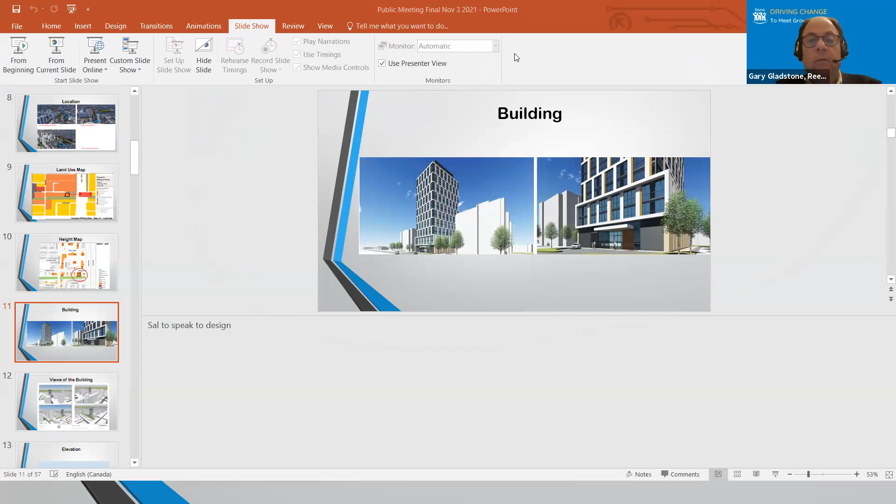We support people with all faiths, cultures, and backgrounds. Reena has been active in developing solutions, not only for ourselves but for the sector. Housing is one of those areas where we've taken a lead role provincially and nationally to address a major concern. We looked at it from the perspective of what are the challenges, what are people experiencing, and how do we solve it.

The number one thing is affordability. When we talk about affordability, I call these the three abilities. We're talking about deeply affordable housing for people who live on $1,200 a month, and how do we give them a place in our community. So we design and plan so that people can afford under $500 a month rent. That is a portion of the community, and a large portion of the community we want to make sure can have access to proper housing.

The second challenge is supportability, probably the biggest challenge for people who have support needs. How do they get just the right supports when they need it and as they need it? That often needs coordinating staffing structures, having access 24/7 without having someone 24/7 in your space. We've been able to develop and model support plans that reduce costs for everyone—the individual, the province—and increase people's sense of safety and security.

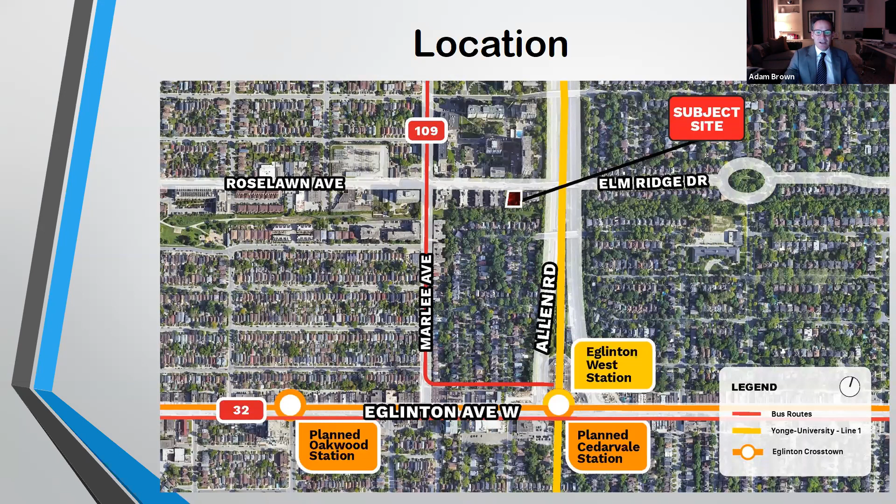I think most of you who live in the area know, and again, Michael Colle, the councillor, has already very clearly described the location. This is just a map that shows you truly how accessible it is to transit, to the subway, to the new Eglinton Crosstown, and to all the facilities in the area, which everyone knows about. So we can go to the next slide.

What we've done here, again, which most of you will know, is given you an overview looking southeast, looking east, looking northeast of the apartment neighborhood and the makeup of that neighborhood in terms of the higher buildings that are included in the immediate neighborhood of this site.

We're also well aware that to the back of the site is a single family neighborhood, which is designated in that way in the official plan. So we've looked at that, considered that in terms of the design that Sal, who's our architect, will discuss in a minute. So if we can go to the next slide.

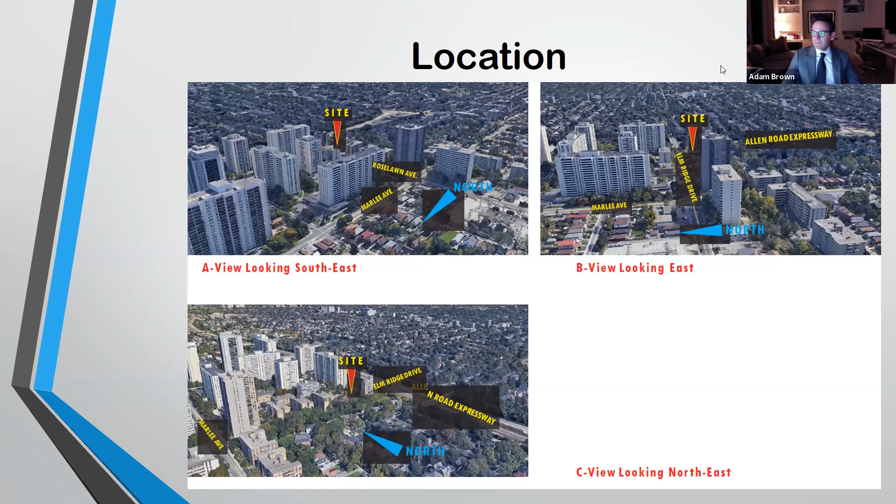This is a slide that shows you the apartment neighborhoods that we showed you with the aerial photos, with the varying heights of the buildings, 7, 9, we're proposed at 19 stories, and all those other buildings, 17, 24, 18. And it gave us some measure of comparison in terms of what we were proposing.

It's critical that we bring forward a design that meets the official plan policies, meets many of the very stringent and important guidelines that the city brings to bear when looking at these applications.

We know this is the beginning of a process which we hope to be expedited, and there's going to be tweaks and input from the city and various staff members. But we think we've brought in an application that's reasonable, not on the highest end of the heights, but still can help us achieve what we need, which is to bring as many units as possible for people like the one who wrote in about their brother needing to get into this building. It's critical that we have a critical mass that makes it function and work for the end users of the building.

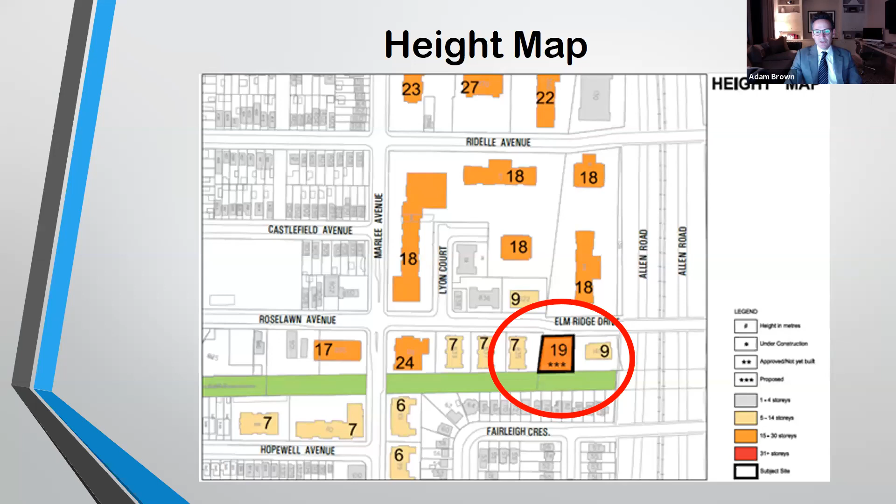Next slide. I'm going to turn it over to Sal. Again, I'll remind everyone that at the very end we'll be here to answer questions. What's important is that we hear from those in the community who live there, who have concerns and comments, and can support us in the process. We want to move forward as quickly and expeditiously as possible, but with a significant focus on cooperation and having the community work with us, because at the end of the day this facility needs the community and the community's support. So Sal, I'll turn it over to you.

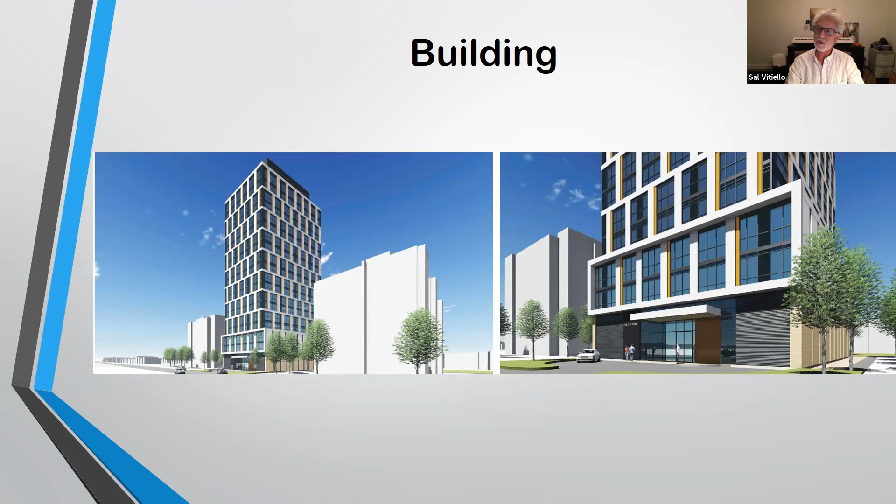We've done quite a few, including the one Brian has in the background picture that's just been occupied recently. Beautiful building. The quality of the materials, both outside and inside, are actually higher than most developers put in, because Reena wants that building to last a long, long time. They don't need the maintenance issues that some leave over to residents who become owners of condo units, let's say. So the quality of the building and what they put into it is quite remarkable, and we're really proud to work with them.

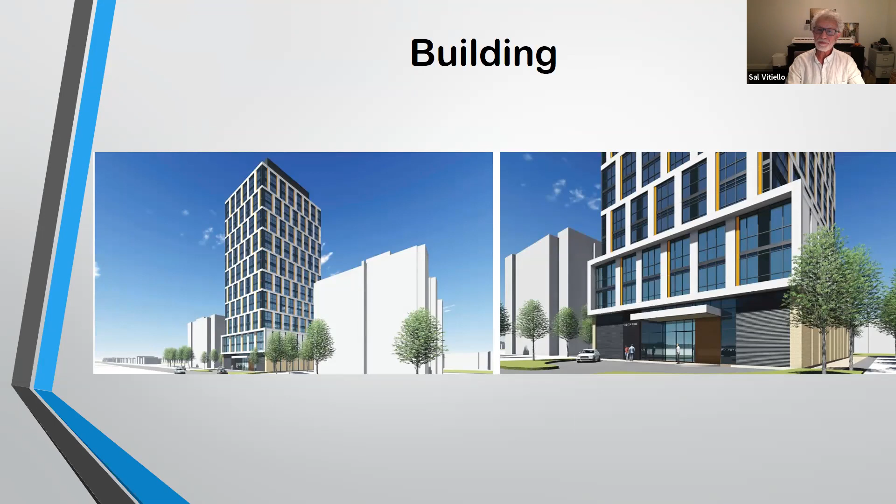Perhaps we can go to the next slide. The building is in a neighborhood, as Adam was mentioning, with 24-story, 18-story buildings, and some smaller buildings. To our east is a 9-story building. To our west is a 7-story building.

In the city of Toronto, we've been working with them to try to make sure we meet as many of the tall building guidelines the city has set out over the past few years. We think we've accommodated most of them. There are some we'll continue discussing with the city, but we believe we have enough setbacks and yard access to the park at the rear for amenity space, that this is a suitable building for the site.

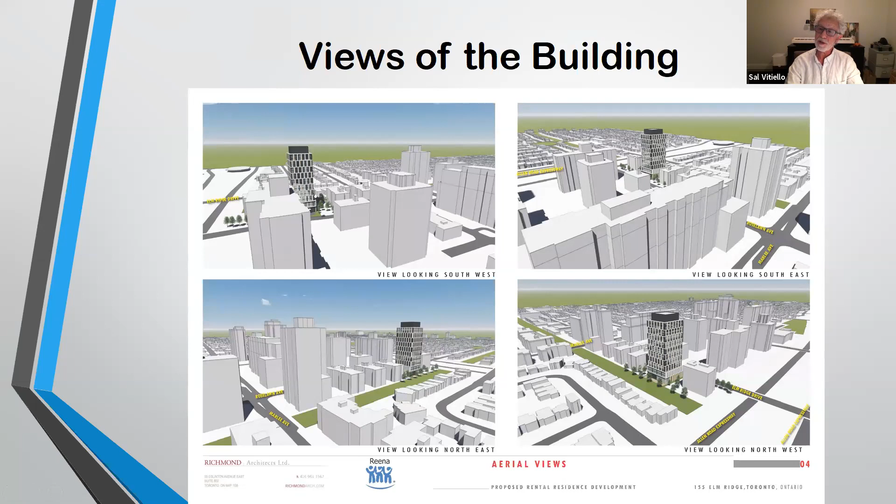And it is going through a review process, which eventually will happen, and it's just started. We've only submitted. The city will send this out to some 20-odd agencies, from school boards to sewers to traffic at the city, to get comments on the building. They eventually bring those back to us after the public meeting with concerns from the public and their own departments, and we work with the city to resolve those. I think we've done a lot of that at the front end, but there'll be more to come, and I'm sure the public will have questions the city will be looking at. So next slide, please.

This gives you an idea of the background, because as much as we have shorter buildings beside us, there's also this background drop that you have, and you can see the heights in the neighborhood. An awful lot of the city now is getting developed where it's checkerboard, where it's high, low. Marine Parade, that whole development done at the water, is in fact built on exactly that principle. So having low, high buildings doesn't bother us. It's really the amount of sky you get to see in the background and the gaps between buildings.

The slab buildings that were done in the old days in this neighborhood are very large floor plates. They sometimes have 12, 14, 16 units on a floor. This building is very small. It's within the floor plate, smaller than the floor plate defined by the city for a tall building—it's in the 600-square-meter floor plate range, as opposed to 750 in the tall building guidelines. So it's a very skinny building with very small shadows. They travel very quickly over any residential properties around, basically sitting on a property for no more than about an hour and a half before they move along.

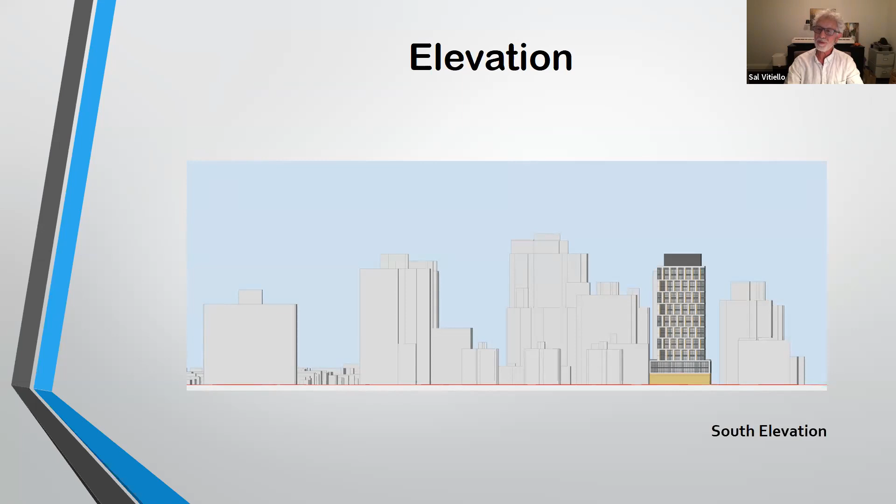Those documents have all been submitted to the city, and I'm sure that after we turn it over there will be an awful lot of questions. So I don't want to talk too much more about the building. I'm happy to answer questions, so I'll turn it back to Brian or Gary, whichever one wants to take it over and take it from there.

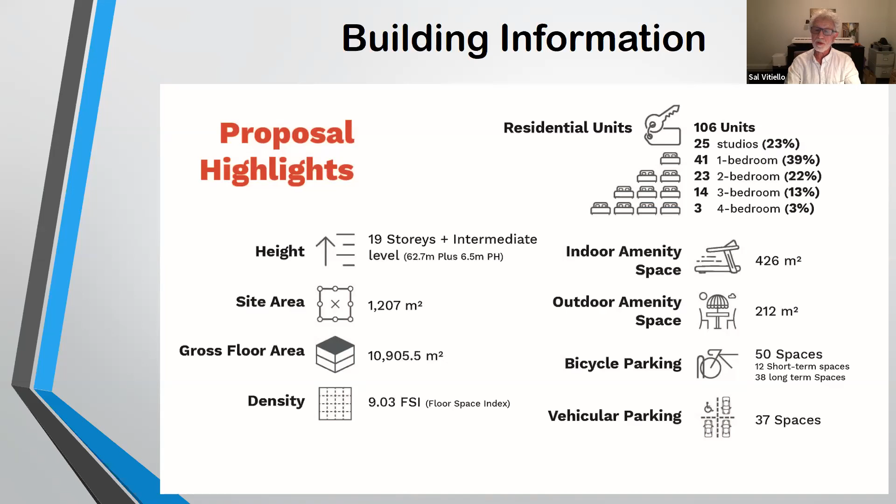Oh yes, I can go through this. Some of this I've already touched on. Height of the building is 19 stories, and the gross floor area is 10,000 meters, which is about 9 times coverage—coverage is really just a formula derived from those two first numbers. There are 106 units; you can see the types, studio units at 23%, and 3 and 4 bedroom units as well. We are providing indoor amenity space, outdoor amenity space, bicycle storage, and the 37 parking spaces I mentioned earlier.

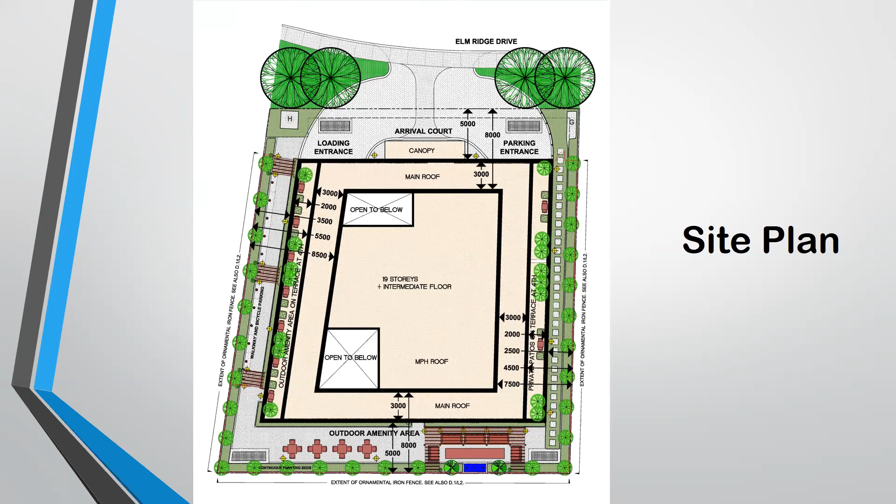Maybe just, sorry, I forgot about these other plans. This is a site plan showing the entrance at the top, on Elm Ridge, coming in off of Elm Ridge. There's a parking entrance to the underground parking on the east side of the building. On the west side is the loading area internal to the building, so the bins will be kept inside and any noise will be kept inside the building. There's a walkway and landscaping of about 5 meters, with dimensions shown on the left and right side as a landscape strip on either side of the tower. The podium is a little wider at the base, but there's still a continuous walkway around, and there's an outdoor amenity area that looks over the park but doesn't access onto the park.

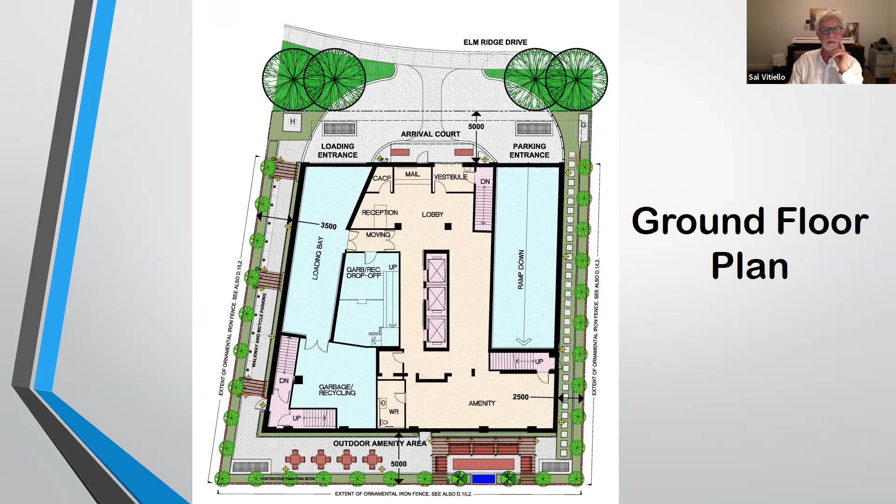Next slide. Okay, questions and answers. So I'll turn this back to Gary, I guess, and let you take the questions and flag them from here. Thank you, Brian, over to you.

Brian, there was one question about whether all units are rental units. Well, thank you. Yeah, all the units are 100%—it's 100% a rental building. Tenants sign a lease, and yeah.

Sorry, there's another question: how will the residents be selected? Because so many families will want to take advantage of this opportunity. This is a major issue, and if you saw Marcia's note—Marcia's son was referenced in that letter I got—it's been tremendously challenging for us. So the way we do it is we have multiple layers. We start with our partners. Each partner selects within their own system, whether it's the Ministry of Health, Developmental Services, or seniors, those individuals that they think will fit the mix and the culture that we want to create.